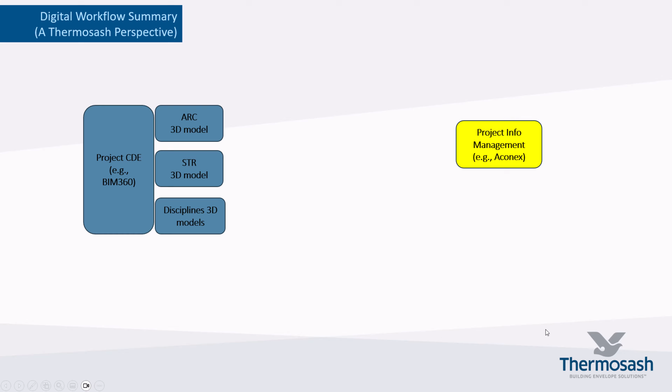When we're given access to the project information management and common data environment like BIM 360, BIM coordination for us starts at the very beginning, when we extract information and provide our CAD engineers and structural engineers with the necessary design information. A group of people work hard to bring the design into the real world. They design the details and propose changes whenever needed, testing the practicality, let's say.

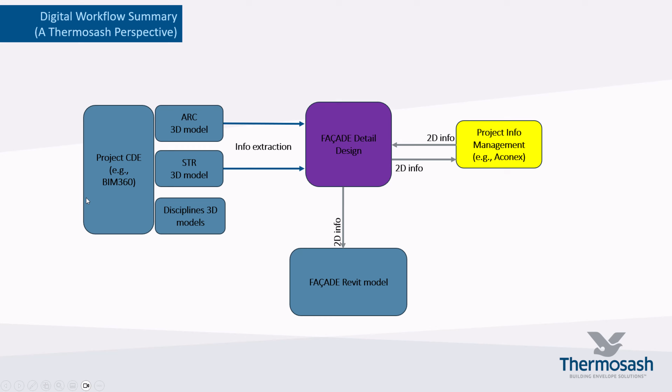The early drafts and set out will then be shared with the architects. We're waiting for them to review and return those documents. This is the time that we start 3D modeling in Revit. We try to keep the model light for coordination purposes. However, there are too many details to be simplified. Still, the model needs to track all of those clashes with the adjacent building elements. So that's kind of an optimization here.

The package will be shared with other disciplines, and of course, we comply with the BIM execution plan in the contract, waiting for the BIM lead of the project to continue that coordination and get back to us with any concerns.

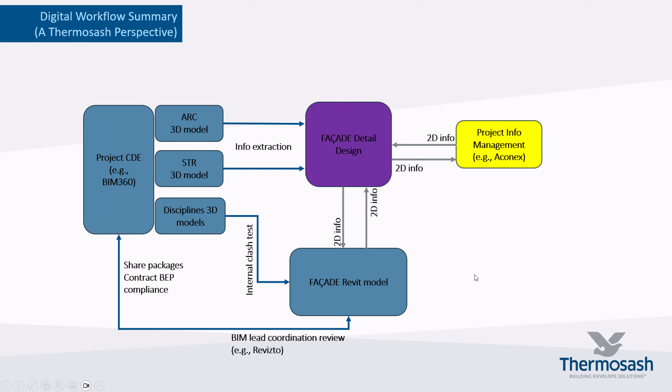This concern then will be passed to our facade detail designers. This is a loop until we reach design consent, we're ready to build, and then our manufacturing team start to make those 3D models with all of those necessary details.

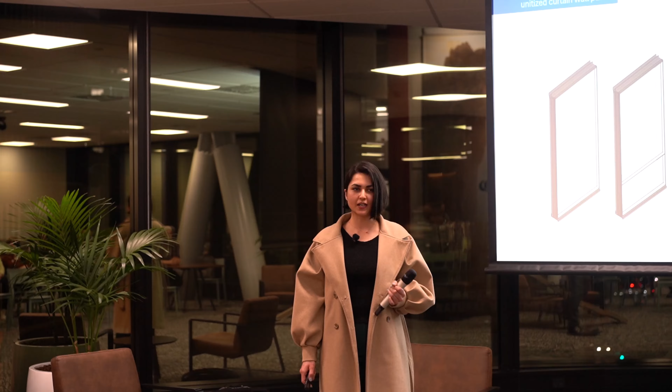But I just want to hold you here in Revit and 3D modeling. I guess all the disciplines are in when everyone wants a smoother communication when we reach to subcontractors. We adopt an approach in Revit 3D modeling which is facade industry friendly. We treat them as a real panel. We model them in Revit in a way that we manufacture them.

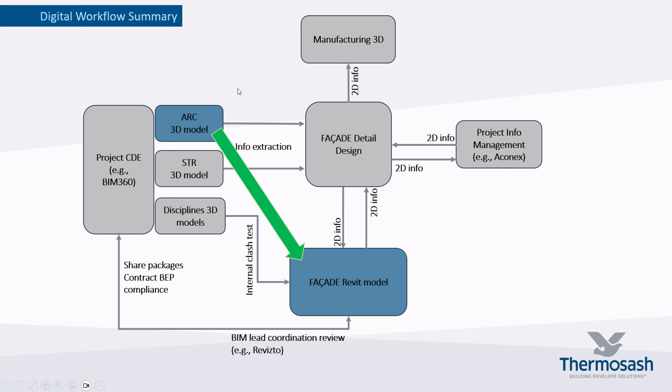These are some components, some building elements in Revit, the curtain panel families. And this is an invitation for the architects. Why not use this approach to make our model a little bit more of a manufacturing model? It, of course, is a shortcut from architectural model to the facade model. And everyone, I guess, needs that sharp information transaction with facade specialists.

We developed some virtual showroom in Revit. They are on our website for you to download. This is PW1000 thermally broken 200 millimeter mullion depth. This is our popular system, but more systems are on the way. Just give it a go, try it, and we would love to receive your feedback.

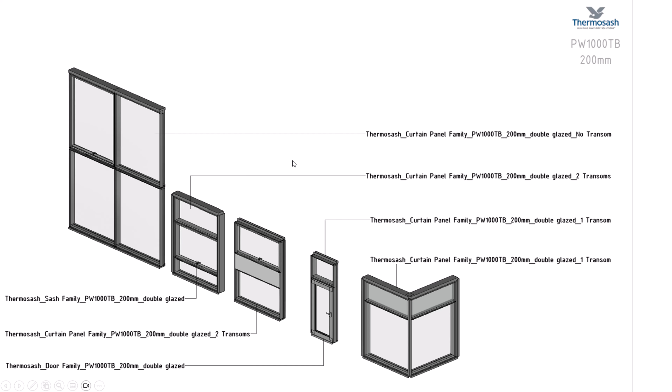And this is what you expect. Just playing with those instance parameters, select out those infills and subframes, whatever suits the project. And eventually you will be able to just have your panel schedule with all of those necessary parameters.

And about the complexity, yeah, not every facade is that rectangular, straightforward, unitized facade. We have some complexity sometimes, and for that purpose, we have also detail items and profile families. You can customize your panel.

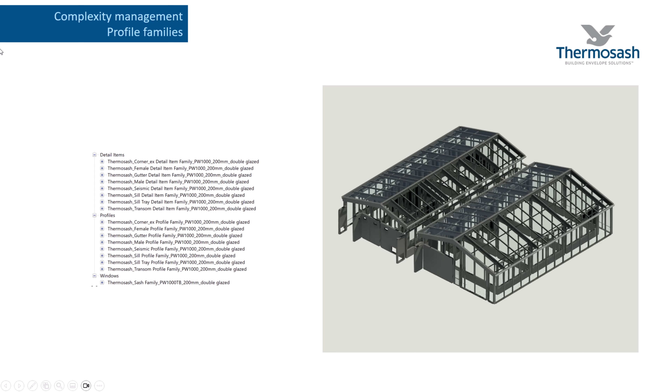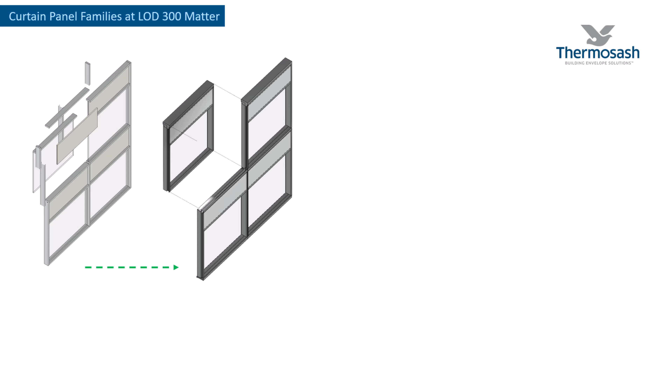This slide is a heads up. Starting with mullion and panel at the very start, like when we try to sketch the facade, is easy and quick, choosing some random mullion profiles. But keeping that simple will leave a gap, and that gap becomes more effort and miscommunication with the contractor. So try to speak the same language with the facade specialist. Everyone will have benefits.

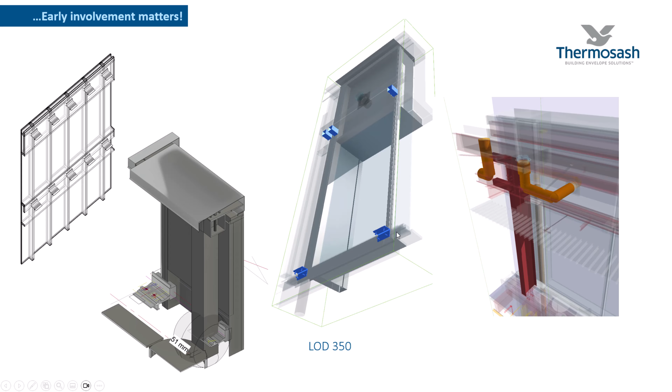Also, early involvement matters for us. We know that facade components all sit with slab structures, and they are not only flat components. We have brackets, for example. We have trouble with clashes. And when we involve facade specialists, reach their consultancy when it is early enough, we can prevent those problems. These problems only arise when we are halfway through the process, and isn't it far too late really?

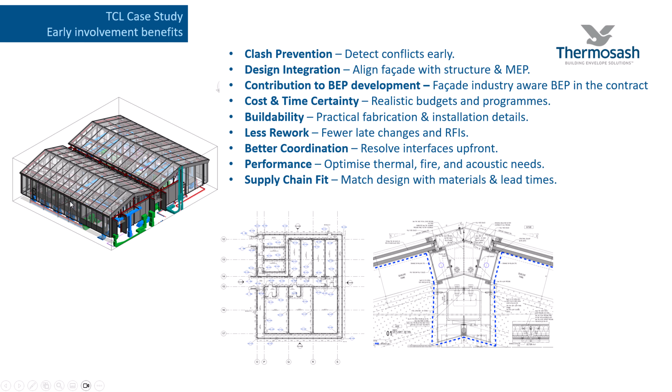We tried this process, early involvement, in a project. It was a complex project, a greenhouse of 21 facade elevations with all of those mechanical services which penetrate the facade system. There was no way we could do that without early involvement. We sat with other disciplines, challenged each other, and reached win-win solutions.

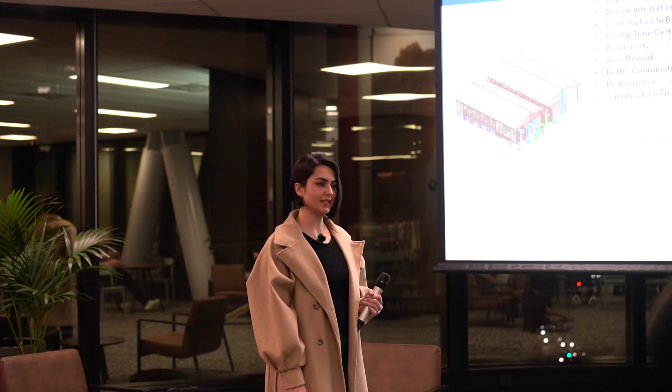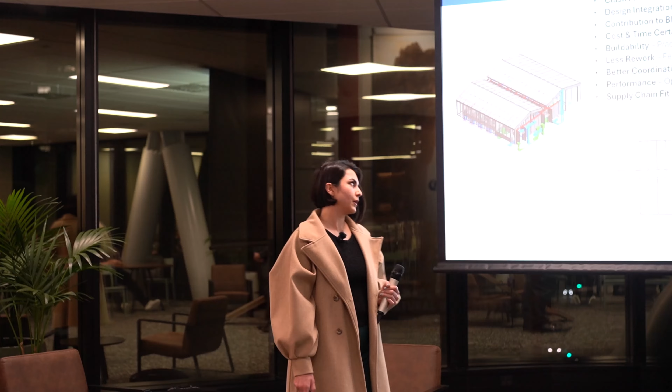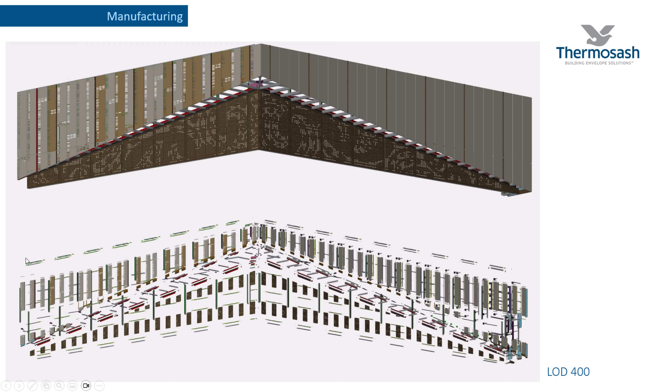And the most interesting part was our contribution to the development of the BIM execution plan in the contract. We made it kind of a facade industry aware document, which was very helpful, and everyone was happy at the end. Because when we as BIM coordinators are busy simplifying models, we have some people on the manufacturing side who are very interested in details down to a notch and a screw. They try to build a high detail model. This model then will feed into our factory machine.

So here is our point. Let's involve facade people early and prevent future problems. And integrating BIM with manufacturing is the future. We at Thermosash heard this industry call. We are trying to adopt it. Of course, it needs practice and empathy.